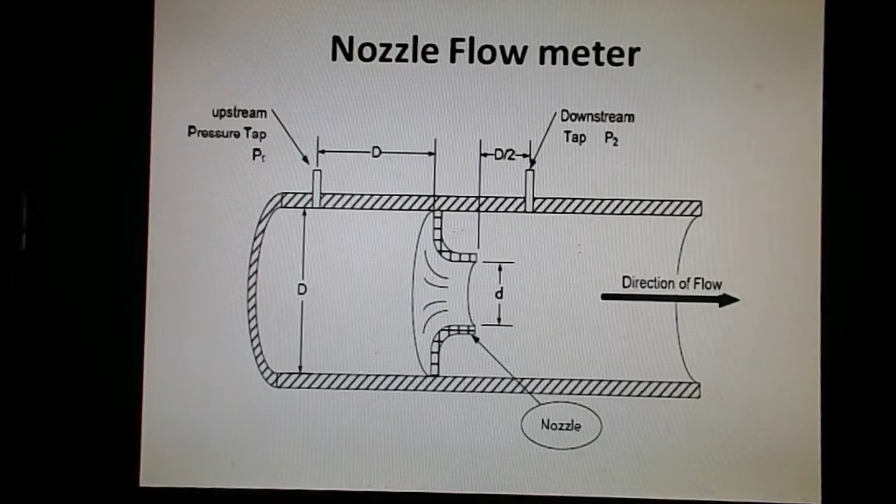So what we have just explained is given in form of notes. So here we are talking about the elliptical contour and a cylindrical throat section. Flow nozzle provides an intermediate pressure drop between orifice plate and Venturi tubes. Also, these can be used for a slurry system which would be otherwise difficult to measure.

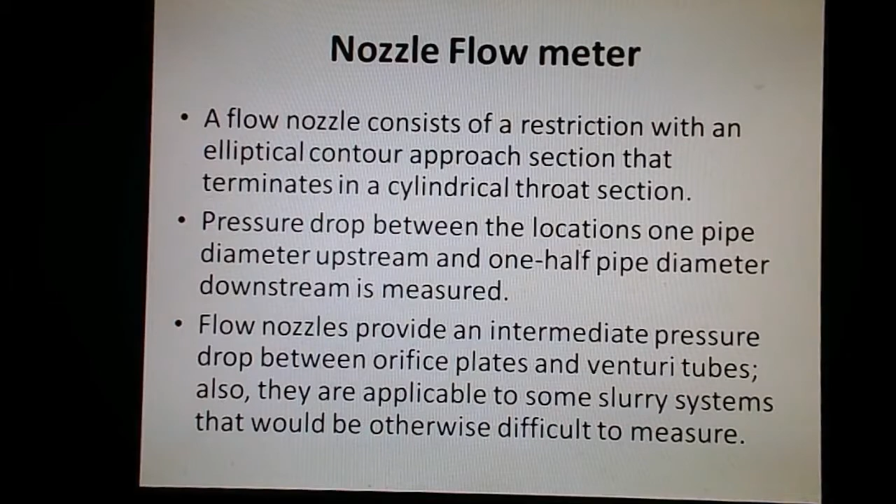Now we come to the principle of operation. Working principle is based on Bernoulli's equation. This is your Bernoulli's equation, and since for pressure tapping 1 and 2 the height is same, the height term goes away and we are left with this equation. Then delta P is equal to P1 minus P2, and if we put the value of P1 and P2 from here, we get this equation: delta P equal to half (rho V2 square minus rho V1 square).

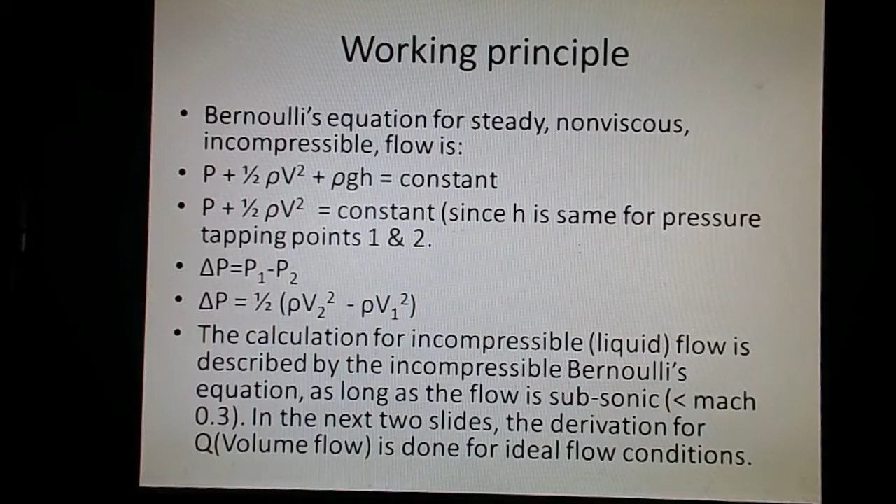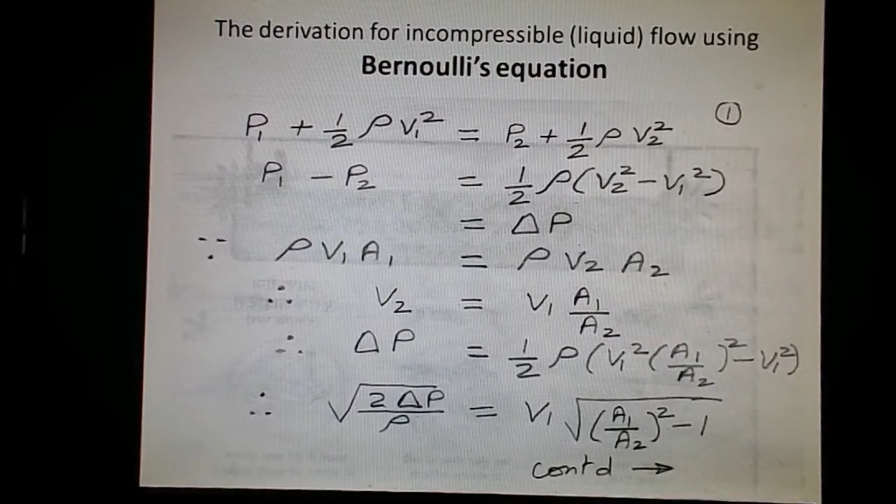Now we arrive at the derivation part. So we are using the Bernoulli's equation for the derivation purpose. We have already explained this equation, and then from mass conservation principle, rho times V1A1 is equal to rho times V2A2, and therefore we get the relationship between V2 and V1, that means velocity at point 2 related with the velocity at point 1. And when we put the value of V2 in the equation, we arrive at this equation, and further simplification gives us this equation. So therefore we get, in terms of delta P, value of V1. So V1 equal to this expression.

You can see that A1, the area at cross section 1, and A2, the area of cross section at point 2, are known to us, density is known to us, delta P we have measured, so the velocity at point 1 can be determined, and we know that volume flow Q is equal to area times the velocity. So Q is equal to A1 times V1, and when we put the value of V1 from here, we get this expression. Of course, doing a little mathematical manipulation, we can arrive at this expression also. So this expression and this expression are equivalent. We can use any one of them.